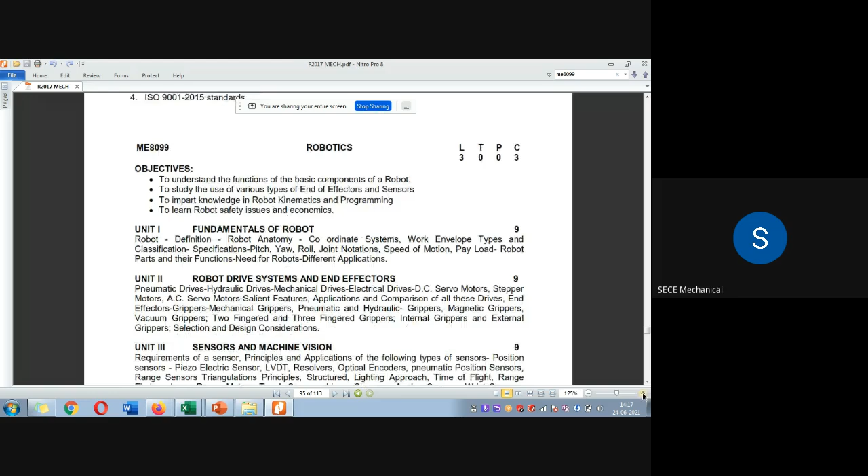Generally we can classify as a DC servo motor, stepper motor, and AC servo motor. So that is DC servo motors, AC servo motors, and also stepper motors.

So in the servo motor, for these electrical drives, what are the various features, and what are the various applications, and how we are going to compare all these pneumatic and hydraulic drives.

So comparison-wise, say for example, what is the load capacity? Out of this load capacity, which one has the maximum load capacity?

Ultimately we know hydraulic drive has the maximum load capacity. So for load carrying capacity, if maximum is required, hydraulic drive will be preferable.

What will be the case for speed and accuracy, or speed and repeatability and accuracy and repeatability? For all this, what kind of drive is suitable?

So with this comparison, once you understand it well, you can very well design the robots based upon the drive system. So the drive system will actually define the application.

So on the application -- if I want to pick and place a 5 kg dead weight, initially for that pick and place, we don't necessarily need a hydraulic system.

Normally, if it requires, a basic electrical drive or a pneumatic drive is enough based upon the application. But if I want to pick a load of about over 500 kg...

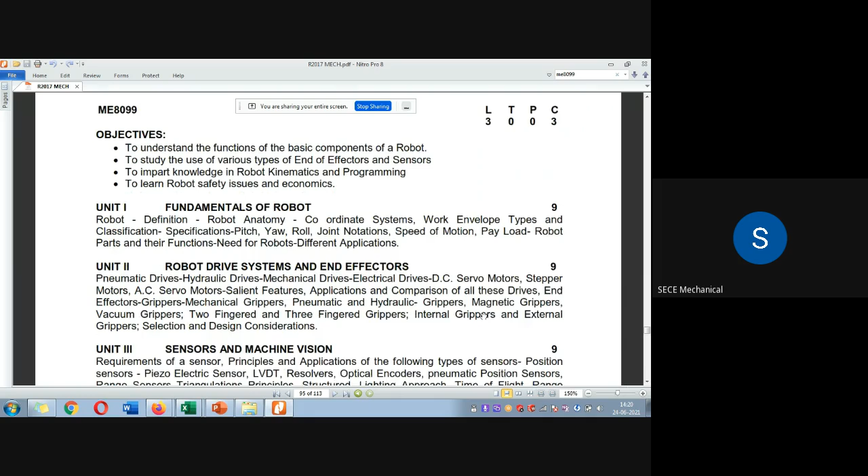So in this next set, we are going to majorly discuss end effectors. Initially we said there is a manipulator - your base is there, attached to some links, and two links connected by a joint. Both the base, links, and joints are connected to an end system called an end effector. Ultimately the application's performance depends on the end effector. So what are the different types of end effectors?

Even though you have a hand and body - the shoulder is attached to the body, and the arm is attached to the body. But all your action and work can be done through your wrist. Without your wrist assembly, without your fingers and wrist assembly, you cannot perform the task.

Likewise, even though a robot has a base (that is a body), and links and joints (that is your arm), without the wrist assembly - which in terms of robot is called the end effector - you cannot perform the task or the respective application.

So these end effectors play a major role, because on the end effector, one can ask what are the degrees of freedom an end effector has. In the last class we discussed what degrees of freedom an arm has, and what degrees of freedom an end effector has. So can anyone answer - what are the three degrees of freedom?

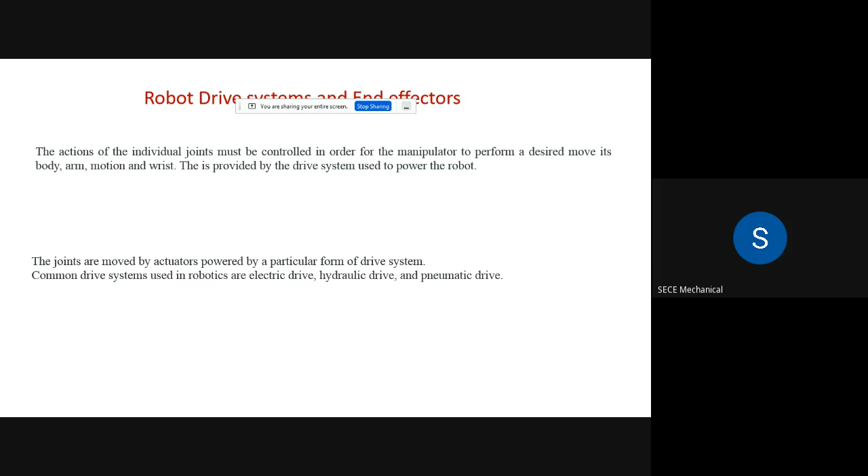So to perform the desired motion, I have to give some driving power to the respective joints. Once driving power is given to the joints, it will perform the desired motions. So desired motion means moving of the body, arm, and wrist. This is provided by the drive system used to power the robot. So the power given to the robot is called the drive system. This is what it generally means.

There are different types of this driving system. The robot will generally require a system for moving the arm, wrist and body. The drive system is usually used to determine the capacity of the robot - depending upon the drive system, whether it can hold down the object, or to what length it can maximally extend, the retraction and contraction. All this is decided by the drive system.

For actuating these kinds of robot joints, the drive system is classified into three different types. One is electrical drive systems, the second is hydraulic drive system, and the third is pneumatic drive system. These are the major drive systems.

Above that, besides electrical, hydraulic and pneumatic drive, there is another technology called mechanical drive system. We are also going to see mechanical drive. Those mechanical drives generally have linkages - based on the kinematics of the links, that is called a mechanical drive system, which is mostly of the manual type.

Now about electrical, hydraulic and pneumatic: electrical drive will mostly have a current-based working system, either direct current or alternating current - that is AC or DC. Whereas in hydraulic system, it will generally use hydraulic fluids, a hydraulic liquid. Whereas in pneumatic system, definitely we will go for compressed air.

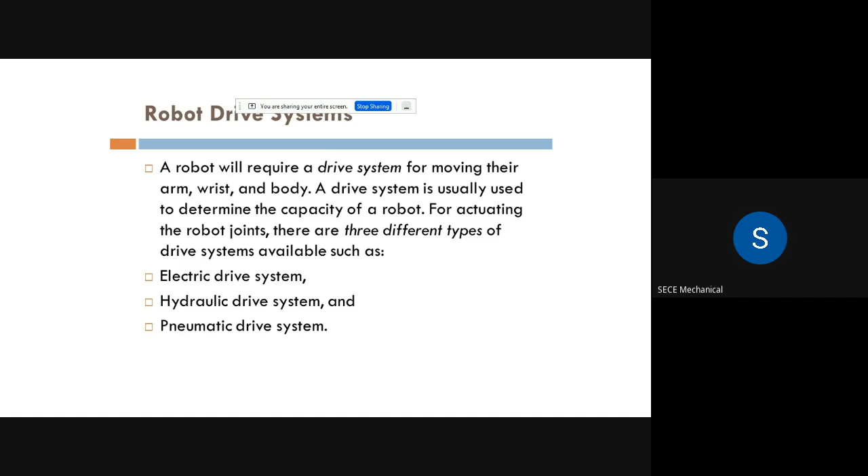So for each drive system there is a power resource. Electrical drive system is nothing but AC or DC current. Hydraulic is nothing but a fluid or liquid - it's a hydraulic liquid, not compressed. And the third one, pneumatic drive system, uses compressed air.

As for electrical motors, there are different types - it may be a servo type, a stepper motor, or direct drive motors. Similarly, there are hydraulic actuators and pneumatic actuators. These actuators are also called drive systems.

So what can the drive system decide? The ultimate purpose of the drive system is to determine the speed of the arm movement. We discussed earlier that speed of motion is inversely proportional to accuracy. Since the drive system selection process is linked with accuracy, the speed depends upon the drive system, and the accuracy depends upon speed.

Depending on what type of drive system you use, if you select an actual pneumatic type of drive system, that will lead to losses, that is an error. The error may occur in terms of desired motion attainment, a compulsory error will come. That is for pneumatic cases. So depending upon the application, you have to choose the particular drive system.

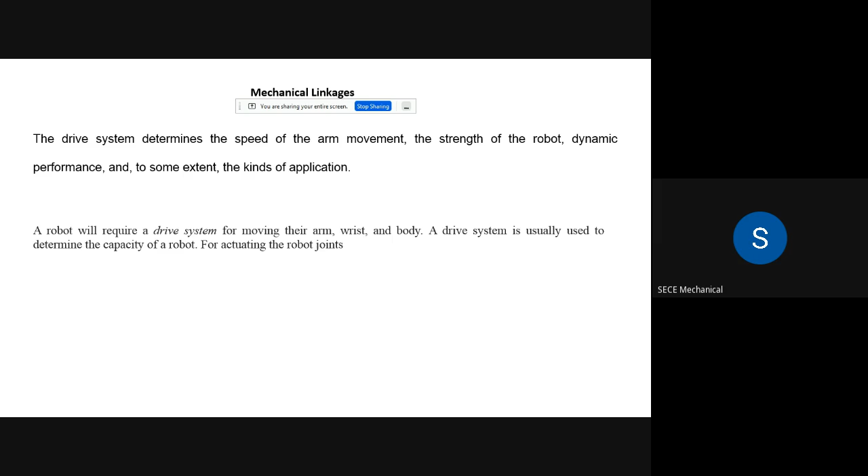That is what I just wanted to convey, along with the strength of the robot, the dynamic performance, and depending upon the application. So these are the types of drive systems.

The first one is hydraulic, known for strength and high speed. In what scenarios would I want to go for hydraulics? When I require a large amount of high strength and high speed, as we see in bulldozers or similar heavy machinery. That is the principle.

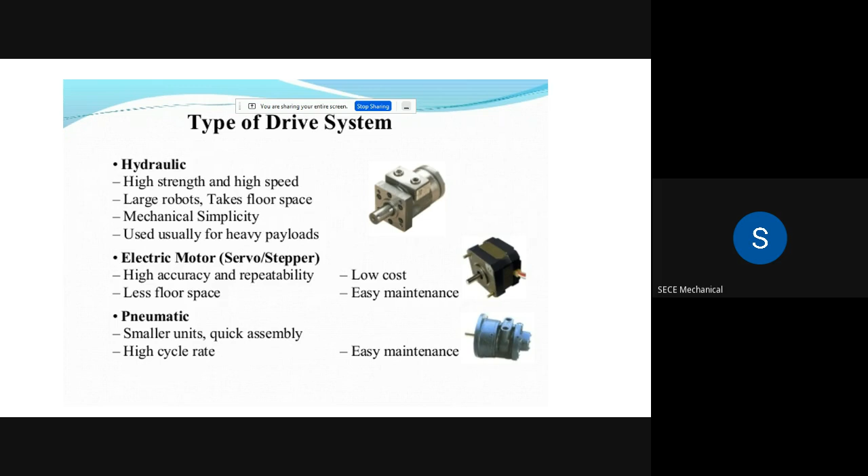Then the next one is called pneumatic. Pneumatics are generally meant for smaller units, for quick assembly, high cycle rate, and easy maintenance, but we cannot determine the respective accuracy factor well. The determinant parameter is also the payload, which will be minimum in terms of pneumatic drive.

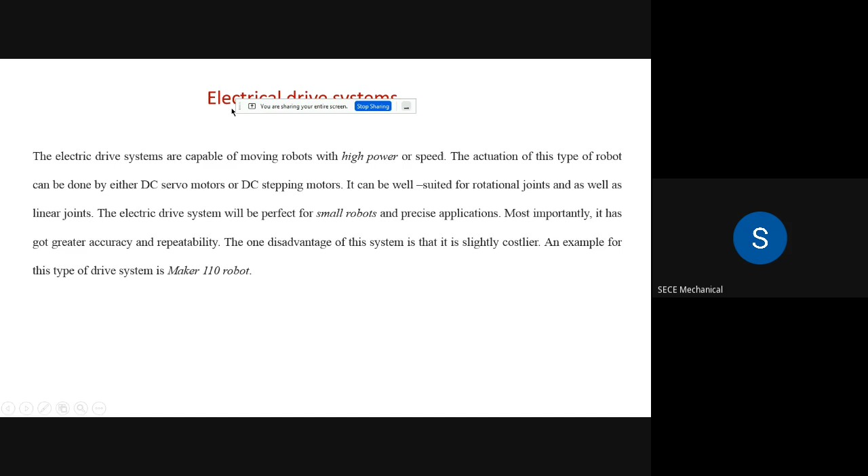Now we are going to see in depth what is called electrical drive, what is called hydraulic, and what is called pneumatic.

So till now, can you follow me? Can you follow me? Will you be able to follow? Shall I proceed? Shall I proceed? Yes sir, okay, okay. Thank you.

So the next step, we very well know that we have three types of drive apart from a mechanical drive that we will see later. In the electrical drive, what are we actually going to do? As I said already, this electrical drive is used for the purpose of actuation.

In what method is actuation done? Either I go for DC or AC. If it is DC, it may be servo or stepper. So in what way, in what application, in what technology or methodology can I go for this electrical drive?

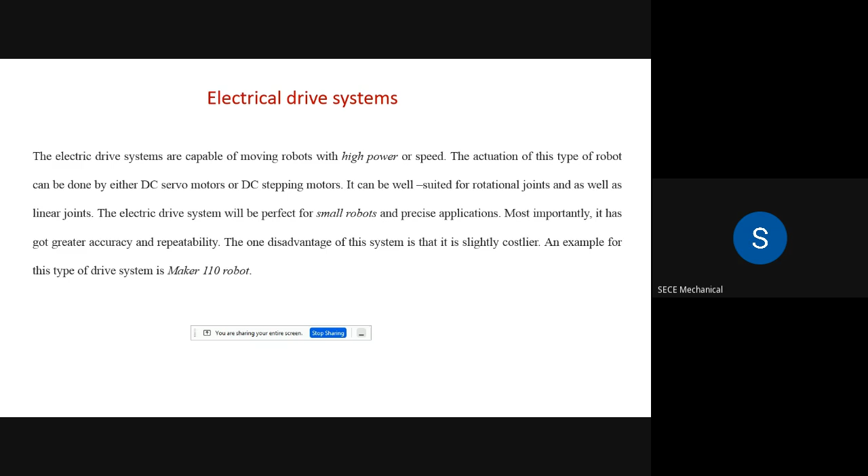The second set of drive system is a hydraulic drive system. As I know, the hydraulic system is having a very much amount of payload, so for hydraulic system since the payload is very high it can be made for large size robots.

And since it has a large size, it can be able to deliver very very high power and also speed than the electrical drive motors. So this drive system can be used for both linear and rotational joint.

Since hydraulic system, the input or the power required is only hydraulic, that is a fluid power, right? So by actuating the fluid through this piston seal arrangement, either I can get the rotating type of movement through this rotational joint, or by means of linear movement.

So using the piston or the movement, I can able to convert those into a rotating type or a linear type, right? Mostly generally the rotary motions, the rotary vanes and rotational type of vanes - I'll show you what is called rotary vanes in further slides, right?

While the linear motions are produced by hydraulic pistons, that I know. So the only disadvantage of this hydraulic system is the leakage. Most of the leakage will be caused by the o-ring, so the o-ring and the sealing.

If in case there is any tearing in the o-ring or sealer, then ultimately the leakage of this hydraulic system will be happening. Thereby it will cause the entire system to get damaged. So with hydraulic drive systems we have to be very very careful.

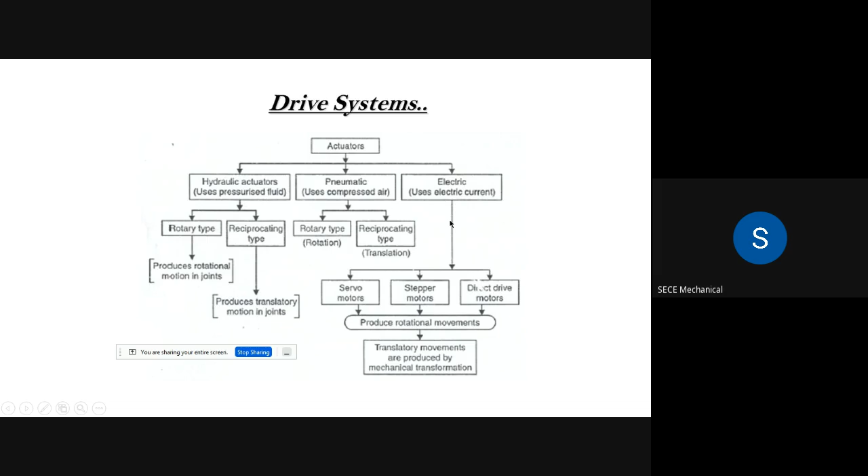These are examples of a hydraulic system. Once it has the fluid pump, if I actuate the top knob, the pressurized fluid which is inside the cylinder or container will give power to the piston. Thereby the movement of this motion is achieved at the end effector.

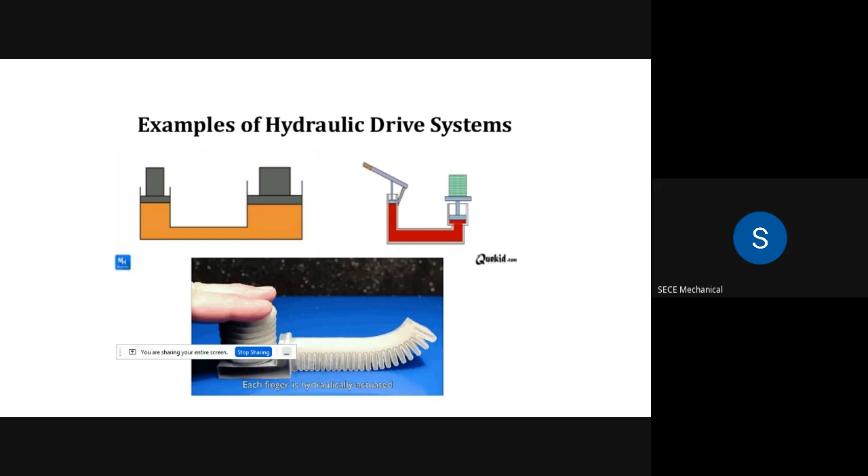Whereas in a pneumatic actuator, each and every type of actuator can be controlled by a valve, either it is a hydraulic valve or pneumatic valve.

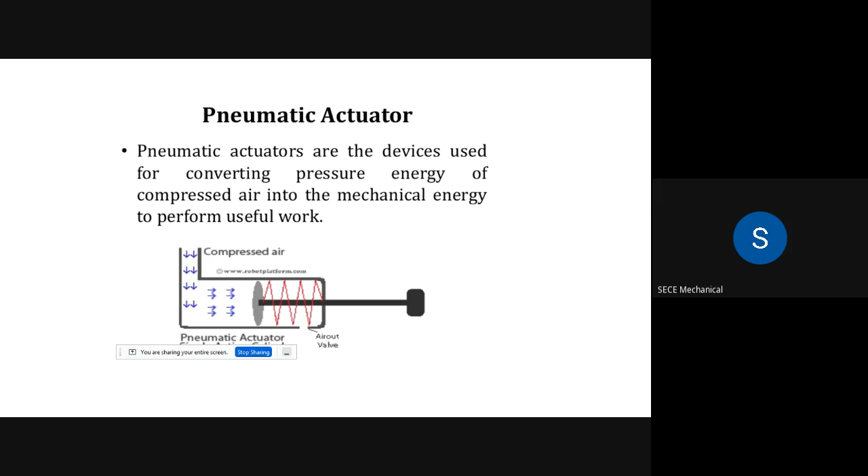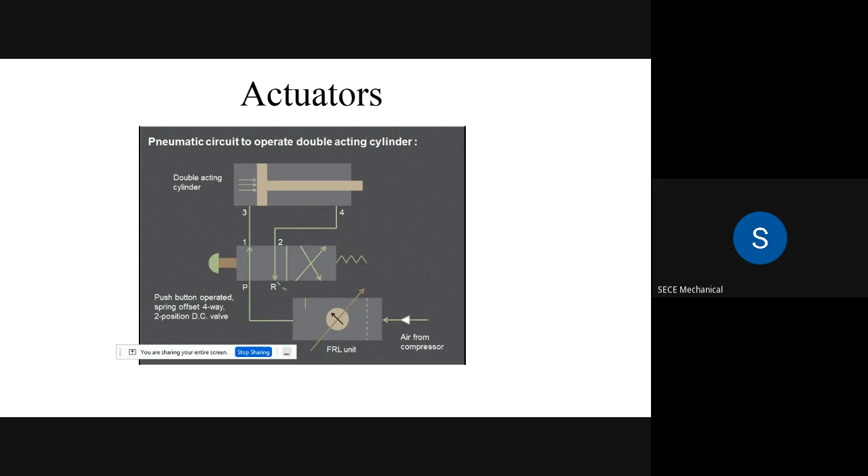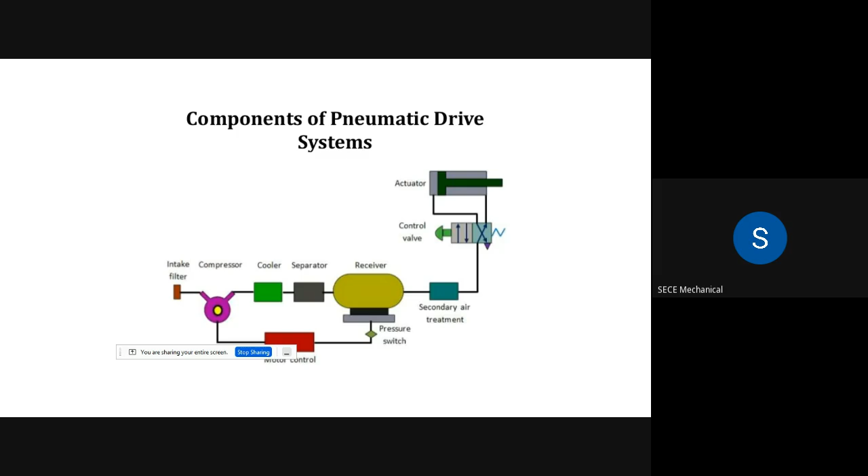This is one kind of simple construction arrangement of a pneumatic drive system. There is an intake filter and a compressor. This compressor is controlled by the motor control, so by means of this, the air is transferred to the control valve. Whatever it may be, the input to the valve is nothing but compressed air. Through the compressed air, and by regulating this control valve, the actuator actuates. It is called a pneumatic actuator. It actuates, so based upon the to and fro movement of the piston, we can directly achieve this drive system.

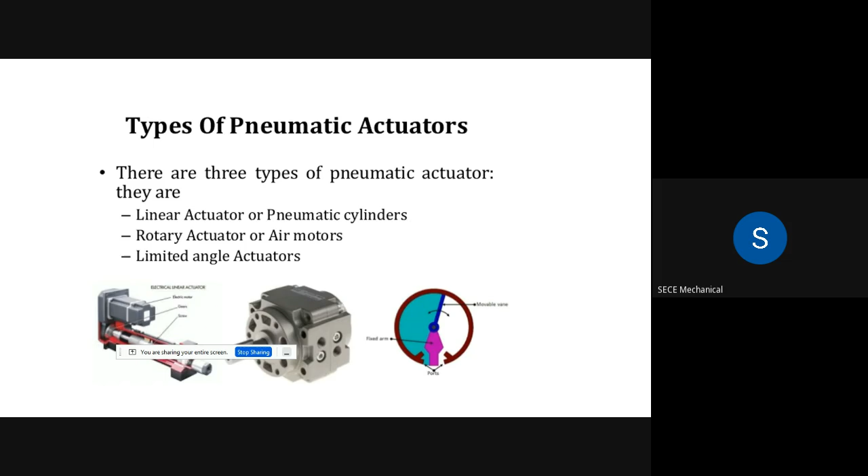This is a small example of types of pneumatic actuators: linear, rotary, and limited angle actuators. These are angle actuators.

We don't want to go in depth on the performance, valves, symbols, and their actuating principles. Depending upon the application, we can choose different types of valves, pneumatic valves or hydraulic valves, for a suitable purpose.

This will come later. The next important type of actuator is called an electrical actuator. The electrical actuator is nothing but a combination called a motor. The motors may be in terms of either AC motor or DC motor, stepper motor and servo motor. These are the various types.

So first let me move on to this DC motor.

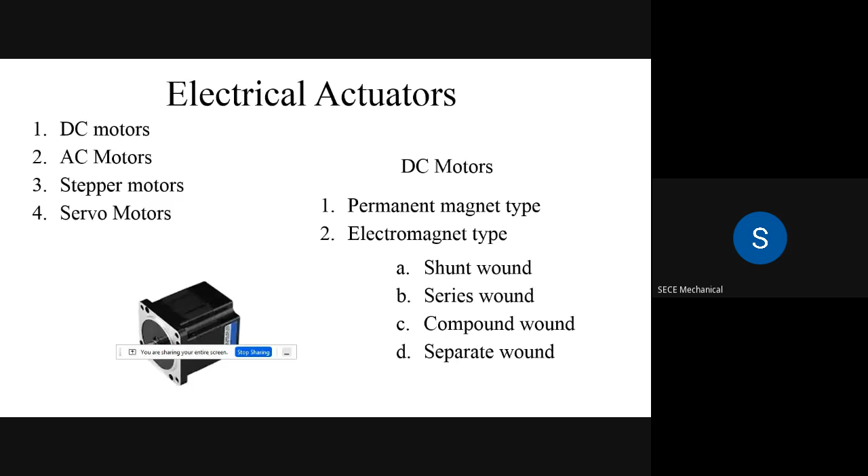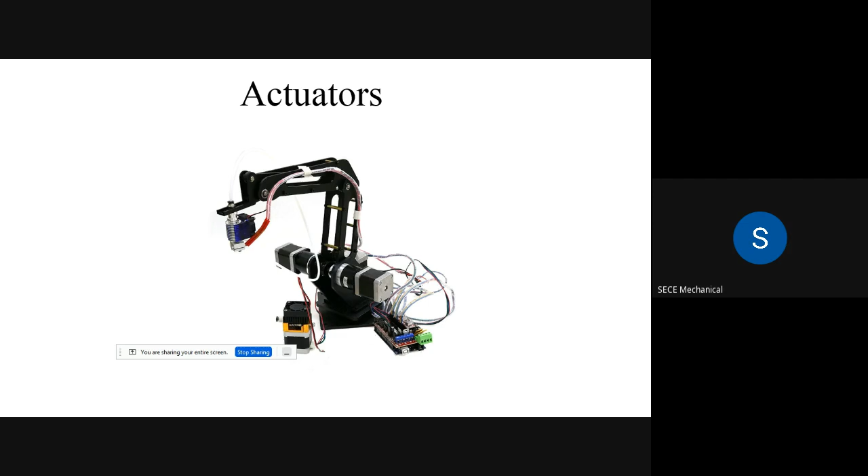This is one kind of assembly, just an image having these electrical motors, where we have the controller, which controls the movement of action, the power actuating to these electrical drives.